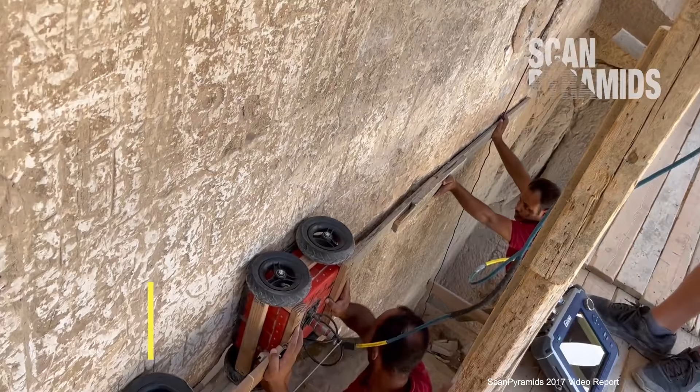But despite the huge number of hypotheses put forward, experts still do not have even a rough understanding of how the pyramids were built. In an attempt to find at least some clue, scientists scan them in every possible way and launch robots into the shafts. But the mystery of their construction remains unsolved.

However, maybe we are just looking in the wrong places. Perhaps we're trying to complicate things so much, putting so much faith in modern, high-tech research methods that we're missing out on the simplest and most obvious things. What if, to unravel the mysteries hidden beneath millions of tons of stone, we don't need to conduct 1,000 measurements, but can simply determine only one number?

You've probably heard many suggestions that the ancient builders recorded their knowledge of the world around us in the Great Pyramid of Khufu. By examining the geometric dimensions of this pyramid and the various relationships between them, researchers discovered that the architects had encoded in it the number of days in a year, the parameters of our planet, the distance from the Earth to the Sun, basic mathematical constants, and much more.

Renowned pyramid researchers of the early 20th century, the brothers John and Morton Edgar, even believed that the Great Pyramid is a Bible in stone, built to reveal prophetic truths about the end of the world, and that the dimensions of the pyramid's corridors encode a chronology of biblical events.

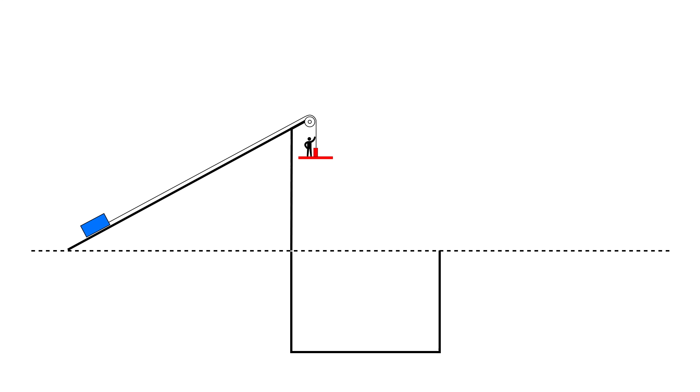In my previous videos, I put forward the hypothesis that during the construction of the pyramids, the blocks were lifted with the help of a counterweight, which was people, and pits like those we see at Abu Rawash and Zawiat el-Aryan weren't just used for constructing chambers. They were an essential part of the mechanism for lifting building materials. Platforms with counterweights were lowered into them, and the people who acted as this counterweight then ascended the sloping ramp.

This method originated in ancient Egypt even before the first pyramid was built, and was used to construct stairway tombs. That's why builders always created a central shaft and inclined stairs inside them. It was this system of inclined stairs and chambers that later became the prototype for the internal structure we see in the Pyramid of Djoser and most subsequent pyramids.

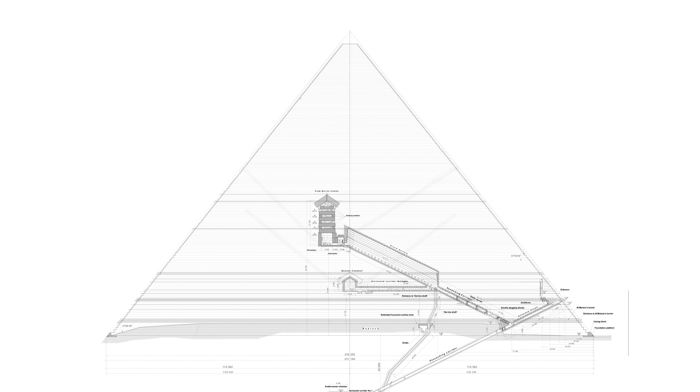And when the chambers and corridors in the Great Pyramids of Meidum, Dahshur, and Giza rose above ground level, so did the pits and ramps. Only these pits were created not in the rocky foundation under the pyramid, but directly in the masonry of blocks. We can see what this looked like in the Pyramid of Sahure, the ruler of the 5th dynasty. I described all of this in detail in previous parts.

However, to continue our journey toward understanding how these grandiose structures were built, we must at some point move from analyzing general principles to determining specific numerical parameters. We need numbers. We need some quantitative characteristics that we can rely on to move forward. And I believe from this perspective, the hypothesis under consideration has one enormous advantage.

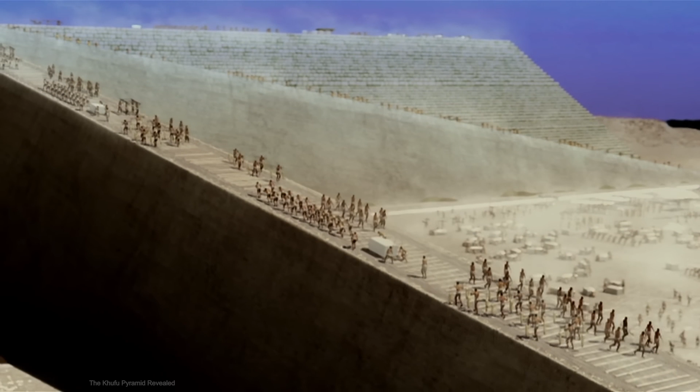For example, if we assume that the pyramids were erected this way, with the blocks simply hauled up ramps by hand, or, say, lifted along their sides in the manner described by Herodotus, we can hardly expect to discover any mathematical regularities associated with the construction process. After all, it essentially makes no difference how far you haul a block, 3 meters closer or 5 meters further.

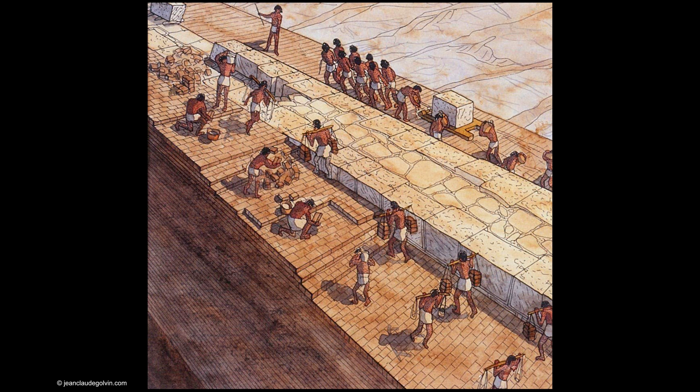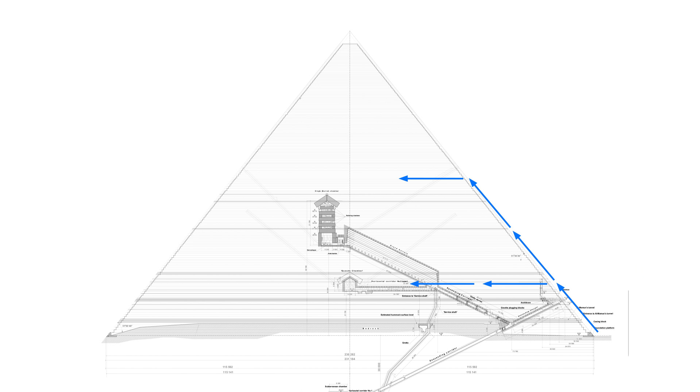For such methods, the specific dimensions of the pyramids are also unimportant. Of course, the dimensions will certainly influence the overall volume of work required, but they are unlikely to have a significant impact on the design process. But if a counterweight lifting technology was used for construction, then the entire system, no matter how complex and multi-stage it was, had to have one critical parameter: the maximum length of the ropes used.

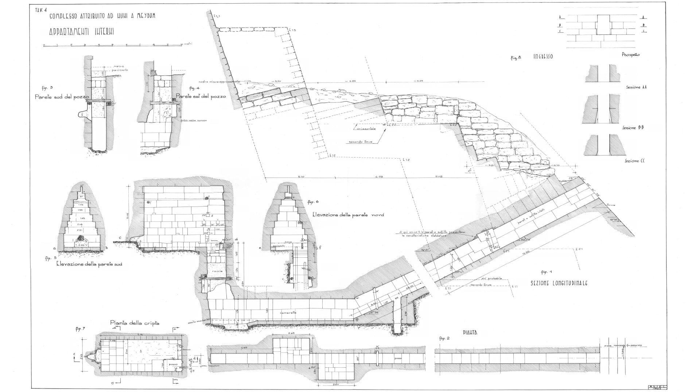Because such ropes had to be produced in huge quantities, I want to clarify right away that we're not talking about the maximum theoretical length. One rope can even be made a kilometer long. We need to find a standard, because if the proposed hypothesis about the use of a counterweight is correct, then this standard value would have been a key parameter in the design of the pyramids and would have been taken into account repeatedly in various aspects of construction.

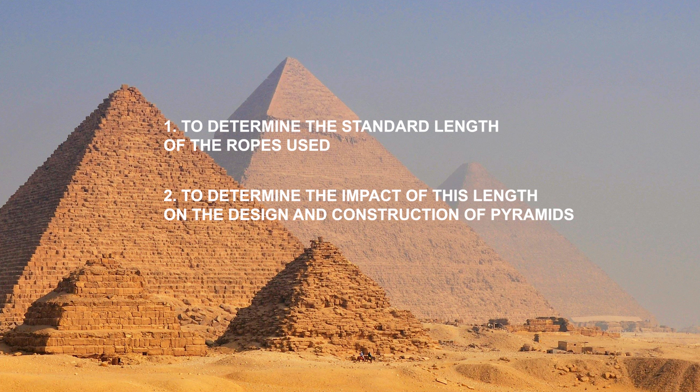So our task is, first, to determine this standard rope length, and second, to understand how exactly this length influenced the pyramid design process. That is, to find features, geometric regularities, or patterns in the internal system of these structures that could be explained by this value. And thirdly, for a complete picture, it would be desirable to understand at what point exactly this standard for rope length appeared, how and when it changed, if of course such changes occurred.

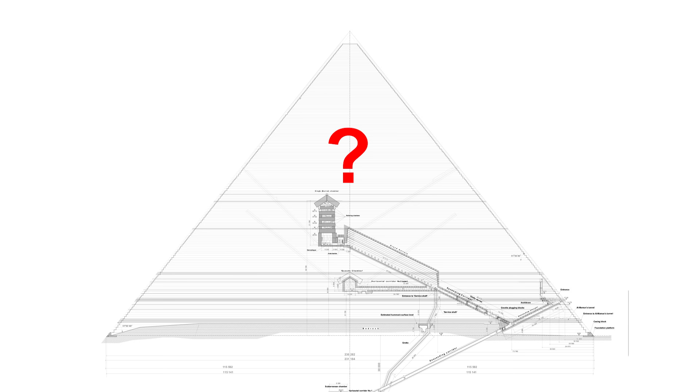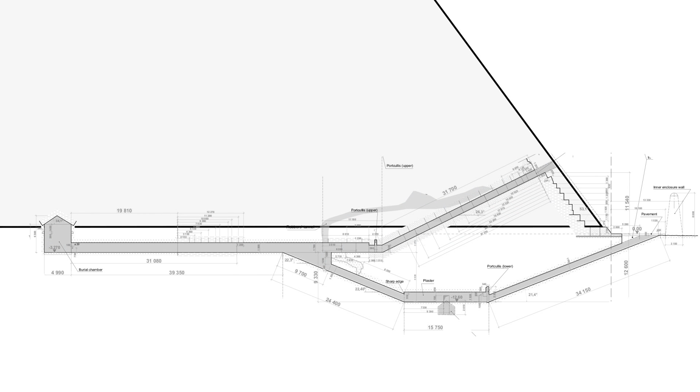Let's start from the beginning. How can we even approximately determine this key value? The idea of how to do this came to me while studying the drawings of the pyramids of Pharaoh Snefru. It's not hard to see that in the larger pyramids, the highest points of the corridors are raised significantly above ground level. Even in the Pyramid of Khafre, both chambers of which are located below ground level, the corridor still rises high. What could this have been done for?

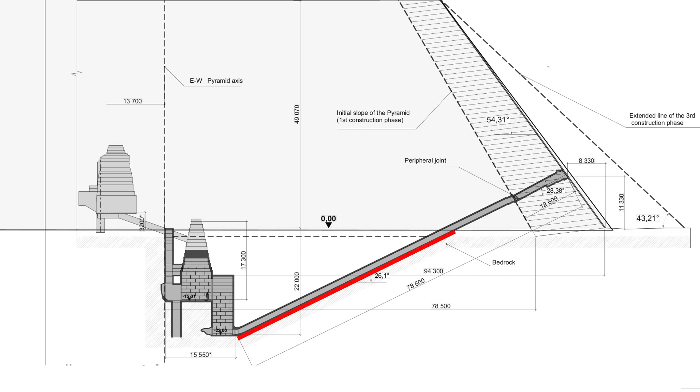As is well known, to create corridors below ground level, inclined ramps were cut into pits. Only the presence of such a straight ramp allowed for a straight corridor to be laid above it. Consequently, in the large pyramids for the corridors located above the surface level, similar ramps had to be created, but directly in the block masonry. In my opinion, there was simply no other way to ensure the straightness of the corridor layout. I believe that the upper edge of exactly such a ramp is what we see at the entrance to the Bent pyramid. I've highlighted it in Franck Monnier's sketch.

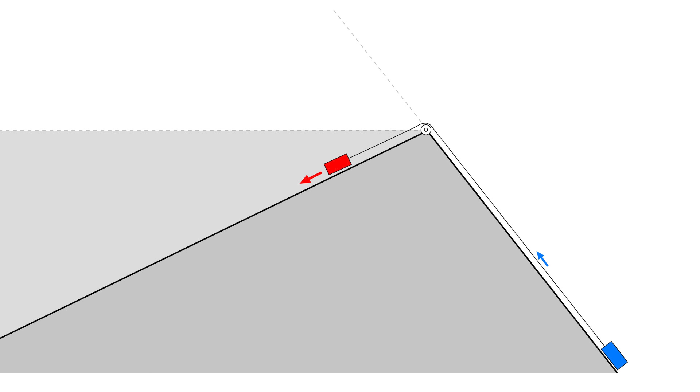And if so, it's reasonable to assume that these ramps were used to lift the blocks and that a counterweight moved along them. Perhaps it was some kind of platform, or they were simply people pulling ropes, thus using both their weight and their muscle power. It's a very simple and very effective method, and I think the ancient builders simply couldn't ignore such a possibility. Now let's look at the pyramids whose corridors are raised higher than all the others. These are the Red and Bent pyramids of Pharaoh Snefru.

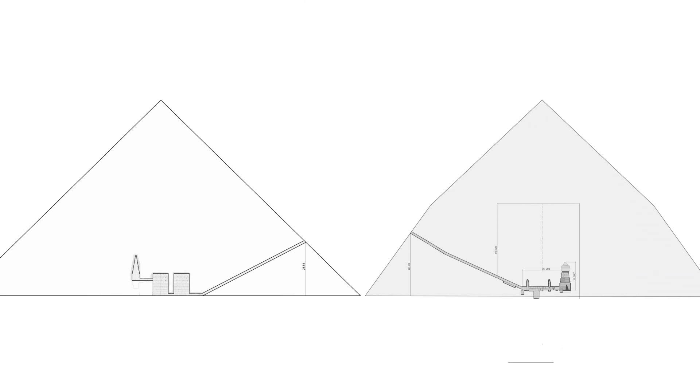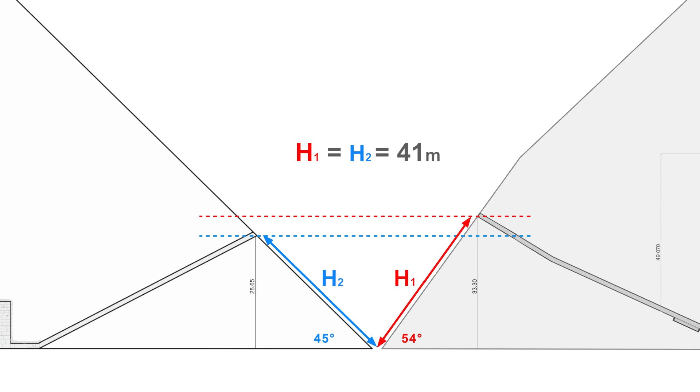Interestingly, despite the pyramids' identical overall heights, the tops of their corridors are at slightly different levels. However, because the pyramids' angles are different, the distances along the face from the tops of the corridors to the base are the same. This coincidence suggests that the builders were likely concerned not with the exit height itself, but with this distance along the face, because the length of the ropes used had to be enough to reach from the bottom point to the ramp. In both pyramids, this distance is approximately 41 meters.

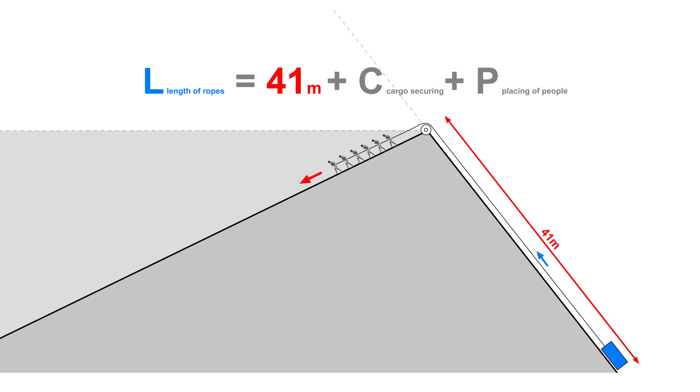Therefore, the length of the ropes was equal to this value, plus some allowance for securing the load, placing the pulley, and placing the people. This is, of course, only a rough estimate, but it gives us an idea of the acceptable range of values for such an important parameter. And now, as strange as it may sound, I am ready to name the exact value of the sought quantity. The ancient Egyptians measured length in royal cubits. 1 cubit equals 52 centimeters and 4 millimeters. And quite logically, the builders chose a round number for such an important parameter: 100. That is, the maximum length of the ropes

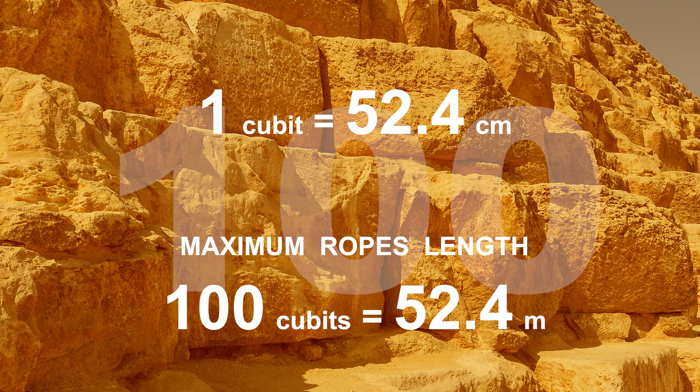was 52.4 meters. As soon as this idea occurred to me, I, of course, immediately began searching for information about the numeral system used in ancient Egypt. Unlike the system we are familiar with, it wasn't positional, but at the same time, it was decimal. It had its own symbols for each power of 10. So for them, 100 truly was a round number.

But what intrigued me most was the symbol used to represent this number. It's a rope with a loop. Apparently, such ropes were produced in such vast quantities that their length even determined the symbol for the number 100. Some sources also indicate that ropes of this length were used to measure land plots. If so, this only confirms my assumption that this length was the standard for manufactured ropes.

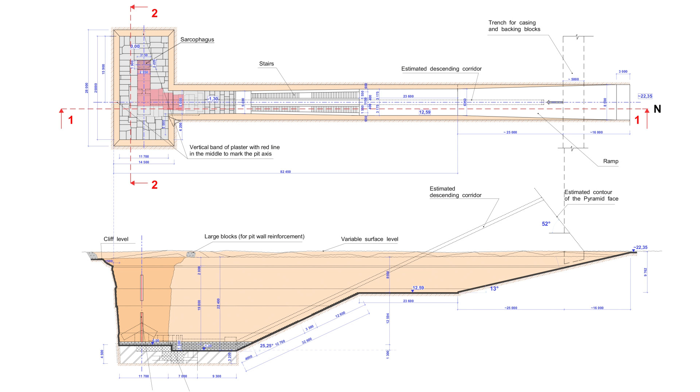And what is very important, this guess has one more crucial argument. The fact is that all the pits whose dimensions we can determine have a depth of 22 meters. The pit in Zawiyet el-Aryan, the pit in Abu Rawash. The pit created for the lower chamber of the Bent Pyramid also had this depth. Furthermore, in the Khufu pyramid, the King's Chamber is vertically separated from the Queen's Chamber by the same 22 meters.

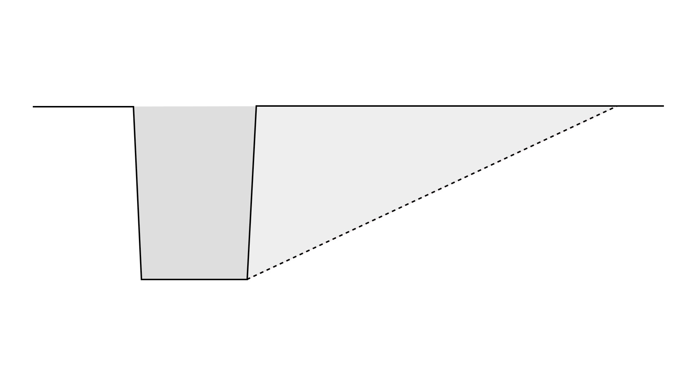I've always been curious about the reason for this kind of standardization, and now it seems to me the answer is obvious. The angle of inclination of the descending ramp in all these pits is almost the same and is equal to approximately 26 degrees. And with this ramp angle and a pit depth of 22 meters, the ramp length is just over 50 meters. That is, the standard depth of the pit was chosen so that the length of the ropes would be sufficient to lower heavy blocks for the construction of the chamber and filling the space around it.

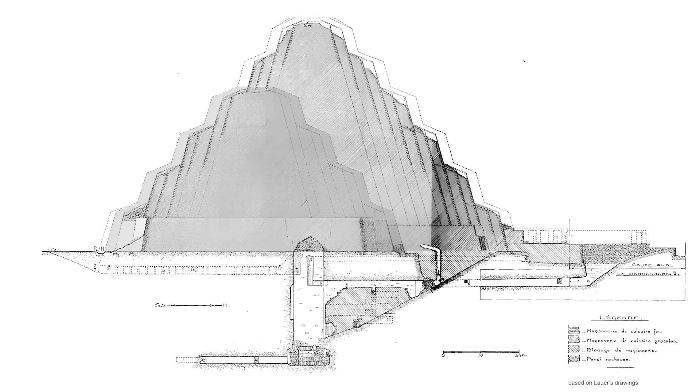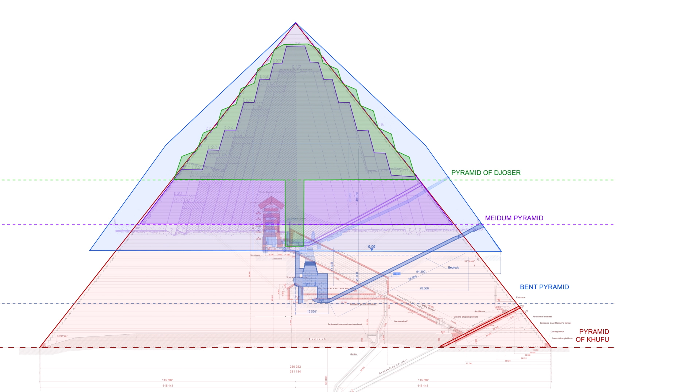I've previously discussed the basic principle behind the development of the first pyramid designs, which I was able to understand by analyzing their drawings. According to this principle, to increase the size of each subsequent pyramid, the designs weren't scaled up as they would be today, but rather a new part was added to the previous design. Moreover, this part was added not from above, but from below. What's crucial is that this development occurred in precisely 22-meter increments.

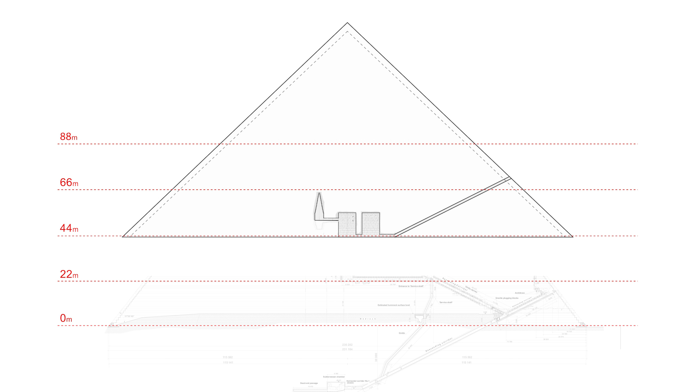This is clearly visible if we compare the pyramid drawings and align them with their apices. Meidum pyramid, Red Pyramid, Bent Pyramid. Moreover, even the pit of the pyramid in Abu Rawash fits perfectly into this ladder.

Furthermore, let's compare the heights of the first pyramids. The pyramid of Djoser is 60 meters high. The Meidum pyramid is usually considered to be 92 meters high, but that's assuming it had been fully developed into a true pyramid. As it was, its height was approximately 82 meters, 22 meters more than the pyramid of Djoser. The Red and Bent pyramids are 104 meters high, another 22 meters more. And in the pyramid of Khufu, the designers added two 22-meter increments, resulting in the famous 147.7 meters.

I am confident that such quantization of the pyramids' heights and the placement of their internal chambers can only be attributed to construction technology. The fact that the pyramids were built in 22-meter increments and that the chambers are spaced 22 meters apart suggests that the construction of the central part of the pyramids occurred in stages.

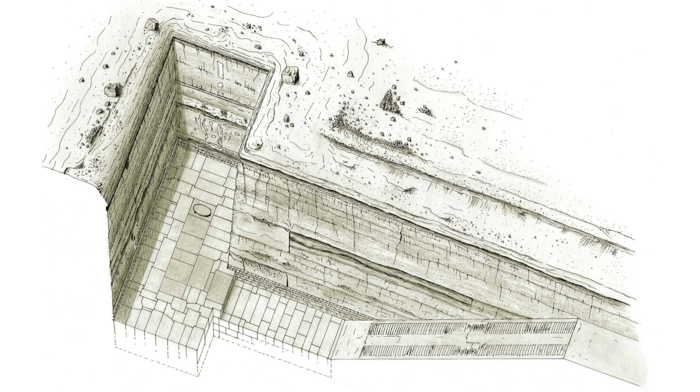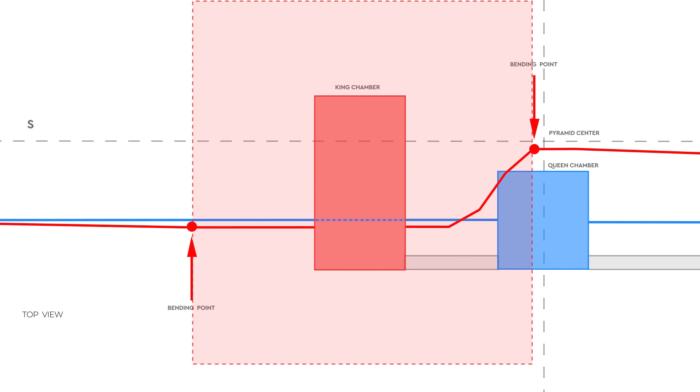The coincidence of the height of each such stage with the standard depth of the pits only confirms the previously expressed hypothesis that the chambers located above ground level were also built in improvised pits created directly in the masonry of the pyramids, and this entire internal system was part of the mechanism for lifting the blocks during construction. And now we have the opportunity to understand how the developmental steps of this system are related to the standard length of the ropes.

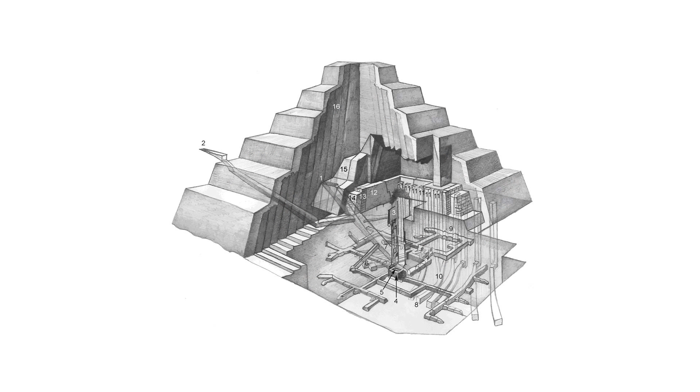Let's move to Saqqara, to the pyramid of Djoser. It was here, in the 27th century BC, that the development that would lead to the construction of the pyramid of Khufu just 100 years later began. Scholars still debate the exact trigger for the construction of this first Egyptian pyramid. What idea, event, or technological innovation served as the impetus for its construction? What exactly was the brilliant solution of the great Imhotep?

Of course, you could say that it was at this point that the ancient Egyptians developed new stoneworking techniques, and you'd be absolutely right. Before this, even the largest mastabas were built from unbaked bricks and gravel, and the Pyramid of Djoser was the first large structure constructed entirely of stone blocks. There's no doubt that this important factor truly influenced the capabilities of ancient builders, and most likely, a pyramid built from clay bricks would have simply crumbled under its own weight.

We don't have to look far for an example. The pyramids of the 12th dynasty, built almost 1,000 years after the Pyramid of Djoser during the Middle Kingdom. They were built from unbaked bricks, and despite their strong stone frame, they now look more like uneven hills than true pyramids. However, despite the rationality of this argument, stonework methods could not have been the sole reason for the construction of the first pyramid, because at the initial stage of its construction, a mastaba was erected. Yes, a large one, made of stone with a well-aligned facing, but a mastaba nonetheless.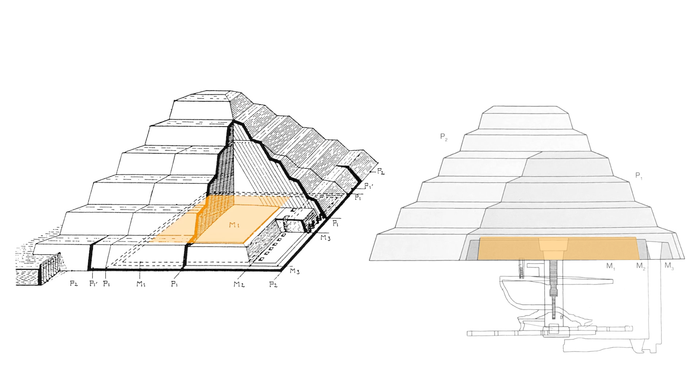It was subsequently added to twice more, but then something happened that prompted the builders to abandon all their previous achievements and build a pyramid on top of this mastaba in 2 stages. What could this have been? To solve this problem, let's try to answer another important question. What length of ropes were used to build Djoser's pyramid?

Before the first pyramid, the Egyptians built a huge number of mastabas. How I think this happened, I already told in this video. The central shaft, a necessary attribute of any tomb, was used to lower a counterweight, which was performed by people, and these people then returned back to the surface to repeat the cycle again and again. This is why inclined staircases appeared in tombs, and that is why in most tombs, the distance from the shaft to the edge of the mastaba is equal to the depth of the underground part of the shaft.

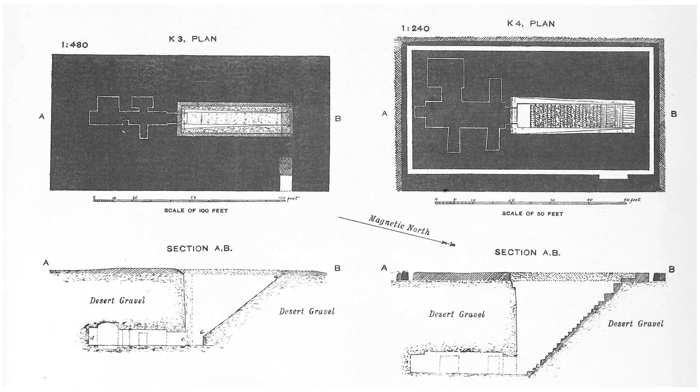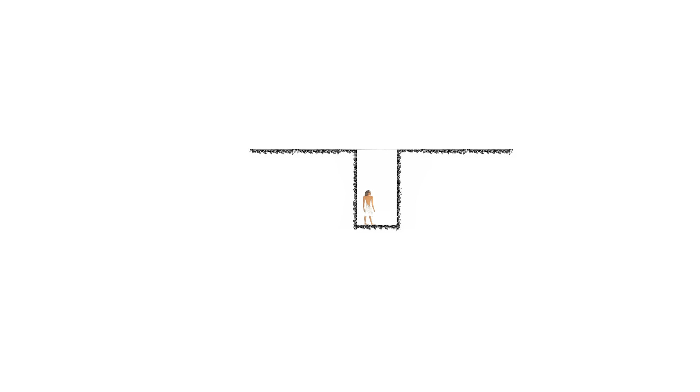In small mastabas, this shaft might be shallow, but for royal mastabas, they obviously tried to make the mastabas as large as possible, and the shaft, accordingly, as deep as possible. How were these shafts dug? There was only one option. People would descend, break through the soil or rock with whatever they could, and then climb back up, and so on for many months in a row.

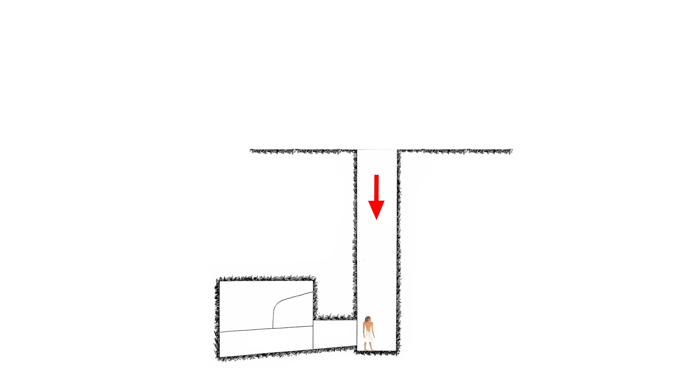What could limit this process? The answer is obvious: the length of the ropes, because there was no other way to descend into the shaft and retrieve the mined rock except by ropes. In other words, if the builders wanted to make the shaft as deep as possible, its depth was equal to the maximum length of the ropes used.

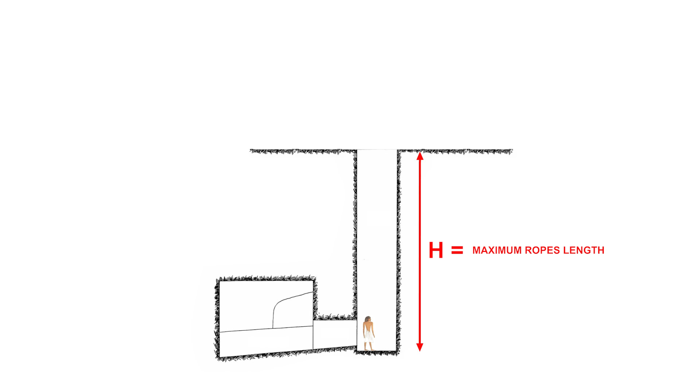However, after the shaft was completed, an above-ground part of the tomb was created on top, and the shaft passed through it. Consequently, the length of the ropes at this final stage may no longer be sufficient. Therefore, the builders had to either initially make the shaft shallower or provide for the possibility of workers exiting in the middle of the shaft.

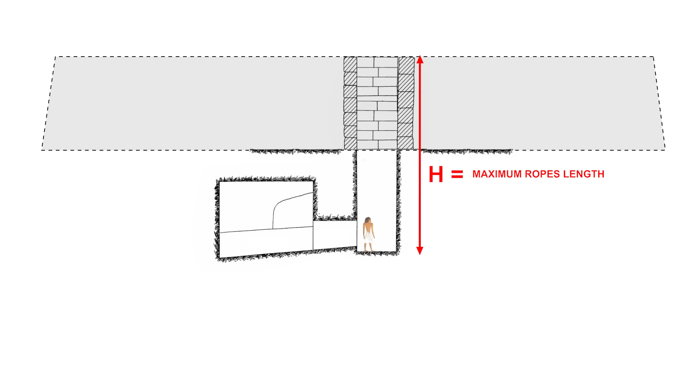I believe this is why such strange burial chamber configurations are sometimes found in shafts. The lower one was used at the beginning of construction, the upper one at the end. In this way, the builders attempted to optimize rope handling at different stages of the tomb's construction. Most likely, mastabas like these, with 2 shafts of different depths, were constructed using a similar principle.

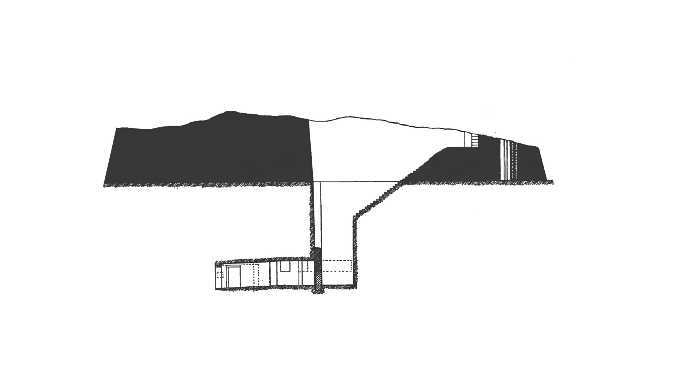I think the same logic was used in the creation of the so-called stair shafts. These are believed to have been a transitional form between stairway tombs and shaft tombs. Here is a diagram of the so-called Mastaba T on the Giza Plateau, also known as the Covington Tomb, which dates back to the 3rd Dynasty. Note that the height of this vertical segment of the shaft was equal to the height of the above-ground part. Let's try to determine the length of the ropes used to create it.

This length of rope was required during the shaft excavation phase. At the end of construction, due to the presence of steps, these same ropes were sufficient for the construction of the above-ground part, since workers who had descended the shaft could exit before reaching the very bottom of the shaft and climb up the stairs.

This means that these stair shafts were a more advanced version of the standard inclined staircases. In stairway tombs, the length of the ropes corresponded to the full depth of the shaft, while in stair shafts, only to the depth of the underground section. And this assumption is confirmed by the fact that the second segment of the shaft in Mastaba T has exactly the same depth. It was excavated as deep as the ropes would allow.

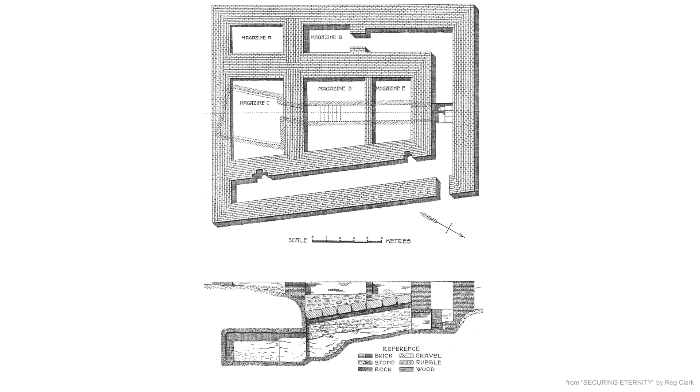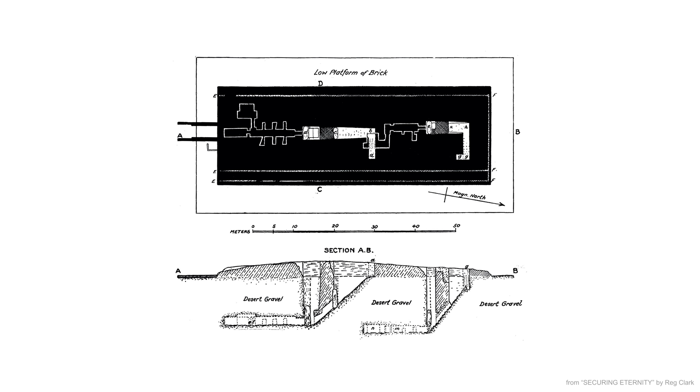And I would like to draw your attention to this important point separately. The development of ancient Egyptian tombs occurred gradually over many centuries. It's been described in considerable detail in the literature. However, the meaning of this development isn't fully understood. The idea that all these transformations were driven solely by a desire for maximum burial safety, as Reg Clark argues in his book, doesn't hold up to scrutiny, in my opinion.

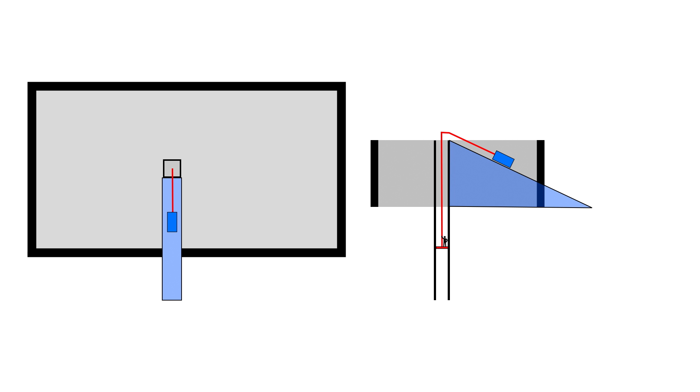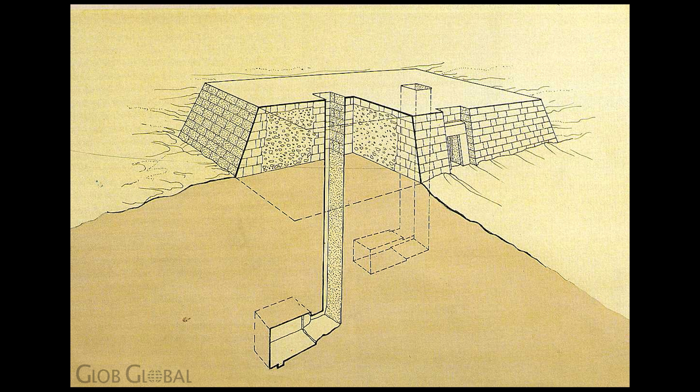But if we accept the version that the underground part of the tomb during construction served as a tool for creating the above-ground part, then everything immediately falls into place. If people descended into these shafts during the construction of the mastaba to act as a counterweight, then it immediately becomes clear why all these inclined staircases were created, why it was necessary to cut several vertical shafts, and why in later mastabas we see shafts of varying depths and strange configurations of burial chambers. Ancient engineers were simply trying to optimize the construction process and build faster and more with the resources available.

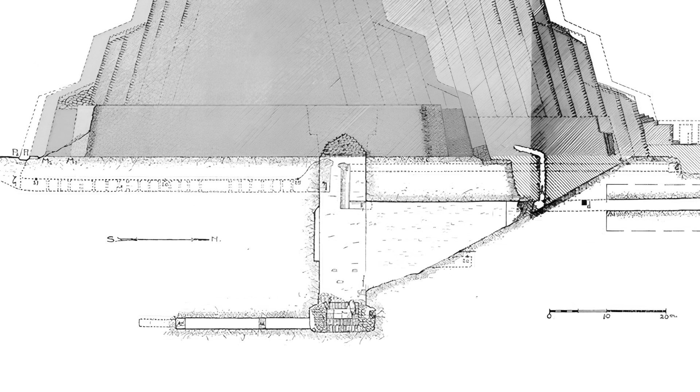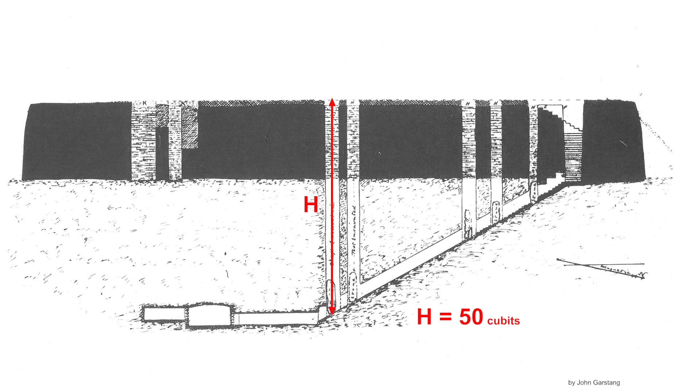An example of precisely this kind of optimization, in my opinion, are stair shafts, which allow for more efficient use of the length of ropes. At the same time, one cannot help but notice that the configuration of the underground part of the Djoser pyramid and the southern tomb located next to it represents just such a stair shaft. The depth of these shafts is 27 meters, or nearly 50 ancient Egyptian cubits. The shaft in Mastaba K1, which was built shortly before construction of Djoser's pyramid, has the same total depth.

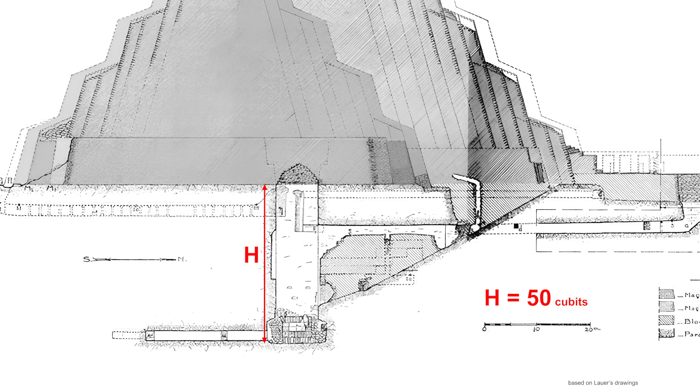All three of these tombs were built for pharaohs, so it's clear that their shafts were constructed as deep as possible. It turns out that these 50 cubits were the maximum length of ropes available at the time, and the builders used this value to determine the depth of the shafts. And there is one more confirmation of this. The inclined staircases in both Djoser's pyramid and the southern tomb were constructed using two segments. It's logical to assume this was done because the ropes simply weren't long enough to lower the heavy stones in one go. Therefore, the descent was divided into two sections.

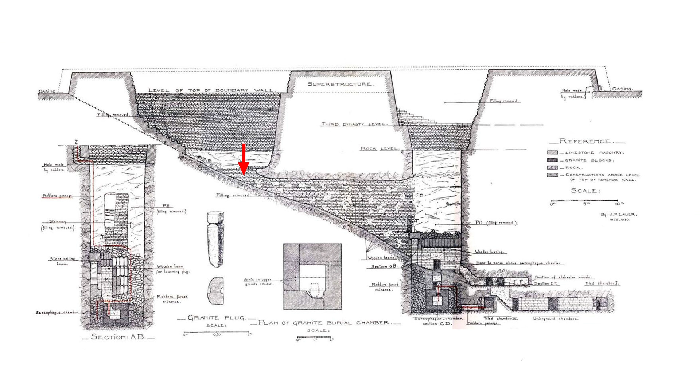At the lower end of the upper segment of the staircase in the southern tomb, we see a recess in the wall. There's a matching recess in the opposite wall. These were obviously necessary for the logs to which the ropes were tied. Don't be confused by the remaining masonry we see in the passage. It simply wasn't completely cleared. Originally, there were 2 rows of steps and a smooth slope down the middle.

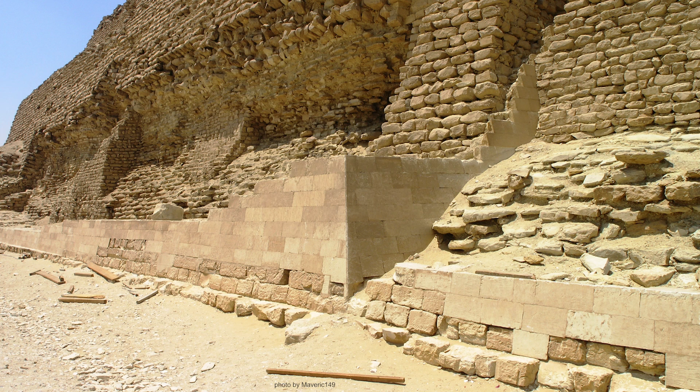We see roughly the same thing on the ramp in the Zawiyat El Aryan excavation pit. By the way, neither in this pit nor in the pit in Abu Rawash are there any notches visible in the middle of the ramps on the walls. And this tells us that the length of the ropes there was sufficient to lower the load in one go. So it turns out that the central mastaba beneath Djoser's pyramid was built with a maximum rope length of 50 cubits. What happened next? I think you already know the answer.

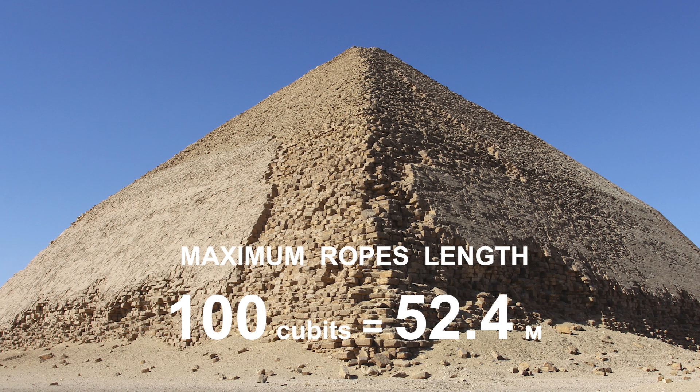The maximum rope length was doubled, and this new standard of 100 cubits, or 52 meters, 40 centimeters, subsequently became the main parameter in the design of the Great Pyramids and lasted apparently at least until the end of the reign of the 6th dynasty. I am confident that it is precisely because of this standard that we see continuity in the development of pyramid designs. If this standard had changed, the dimensions of all the intermediate construction stages, the depths of the pits, and the distances between chambers would have changed.

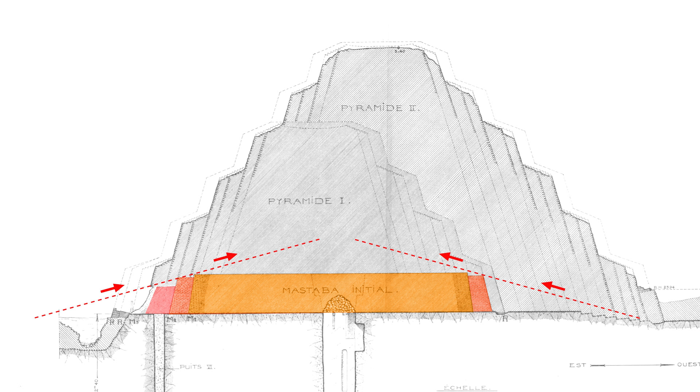As for the mastaba beneath Djoser's pyramid, while previously the ropes were sufficient to reach the edge of the mastaba, this upgrade made it possible to build a larger sand ramp and continue hauling blocks up it. I believe this explains why the subsequent extensions are slightly lower than the central section. This change in standard is confirmed by the fact that during the third stage of the pyramid's construction, the M3 extension was added to the side of the central mastaba.

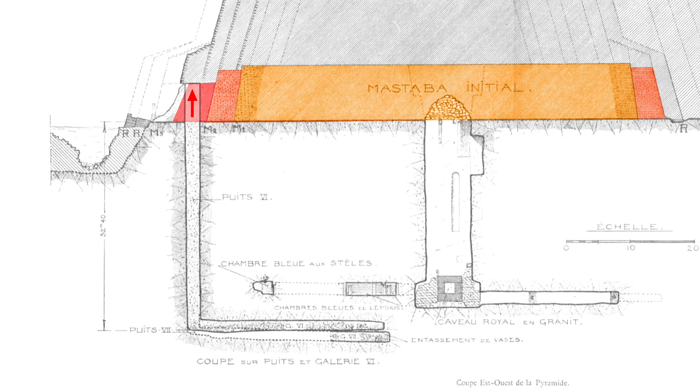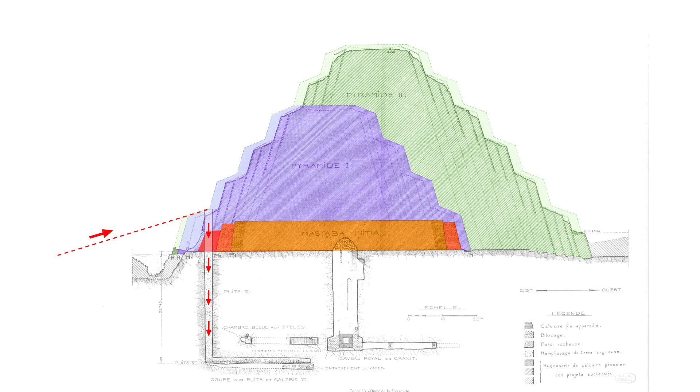This raises another important question. Could these shafts have been an additional tool for the construction of the first 40-meter-tall pyramid, which was then increased to 60 meters during the final stage of construction? If the central shafts in mastabas were used to lift building materials, then perhaps these were used in the same way. We won't try to give a precise answer to this question now, but I still want to share one interesting observation with you. Here's a drawing of the Djoser pyramid.

Its base measures 109 by 120 meters. We're looking at the long side right now. So that you can check me, I will display the coordinate grid. And here's a drawing of the Khufu pyramid to the same scale. Its base is 230 meters long. Earlier, I suggested that it had vertical shafts for the movement of the counterweight.

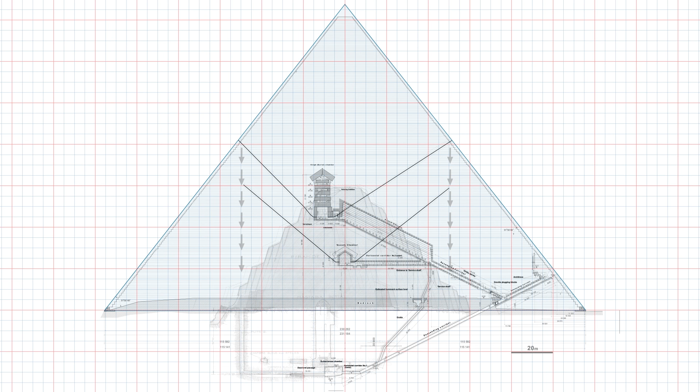Now let's try to align the pyramids relative to their apices. Notice how the shaft of Djoser's pyramid aligns with the king's chamber and the relieving chambers of the Khufu pyramid. Moreover, the southern incline channels abut the vertical line of additional shafts under the M3 extension.

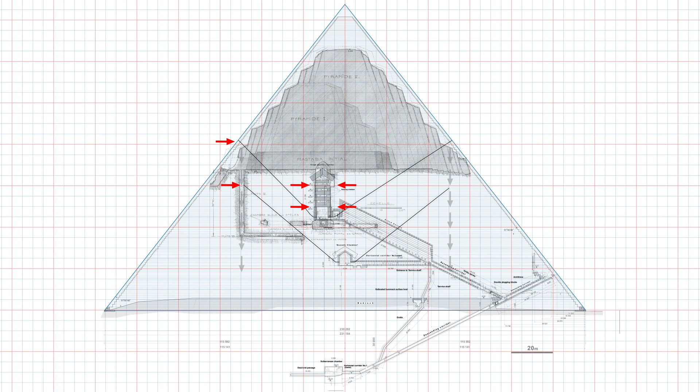Could all this be a simple coincidence? Or are such geometric patterns also dictated by the specifics of the overall construction technology? I think we'll be able to figure this out later.

Next to the three great pyramids on the Giza Plateau are the so-called satellite pyramids. They were built for the wives and immediate family members of the great pharaohs. To avoid confusion over their difficult-to-pronounce names, scholars have come up with short alphanumeric designations for them.

These structures have survived to this day in varying states of preservation, allowing us to trace the sequence of their construction. First, builders erected the inner core, consisting of steps on which backing stones were then laid, and then the casing blocks were installed on top of them. Remnants of this casing can still be seen here and there on the lower rows.

I believe that if we want to understand how the Egyptian pyramids were built, it's crucial to understand the construction methods of these relatively simple satellite pyramids, and only then try to extrapolate them to more complex structures. These small pyramids have no excavation pits or chambers with corridors above ground level. They are simply blocks, carefully stacked one on top of the other.

In the comments to previous videos, I've often been asked how I think the tops of the larger pyramids were constructed. I'm confident the answer is very simple. They were built in the same way as these satellite pyramids. What might their construction process have looked like? To understand this, let's pay attention to one very important detail.

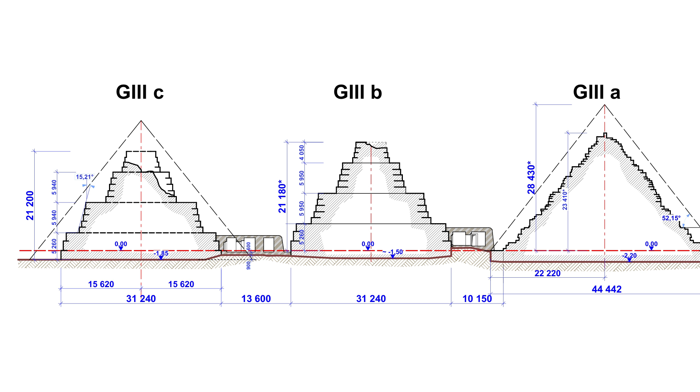In addition, the size of the ledge in front of the last step is very small. The block being lifted would barely fit on it, and it would hardly have been possible to place any lifting mechanism there. The only remaining option is a ramp. It would be possible to create an external ramp and gradually build it up. But then the volume of this ramp at the end would exceed the volume of the pyramid itself. So this option was possible for the first rows, but hardly rational for the entire pyramid as a whole.

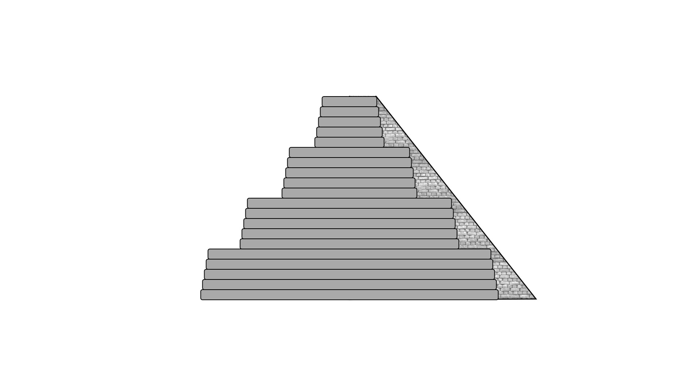So what's left? I think a temporary ramp could have been created from small blocks or clay bricks running from step to step. Its volume would have been relatively small. Each section would have rested on the next step, which would undoubtedly have increased its stability and allowed for its extension and repair in sections. There could be several such ramps, and they could go on all four sides for ease of feeding and installation of blocks.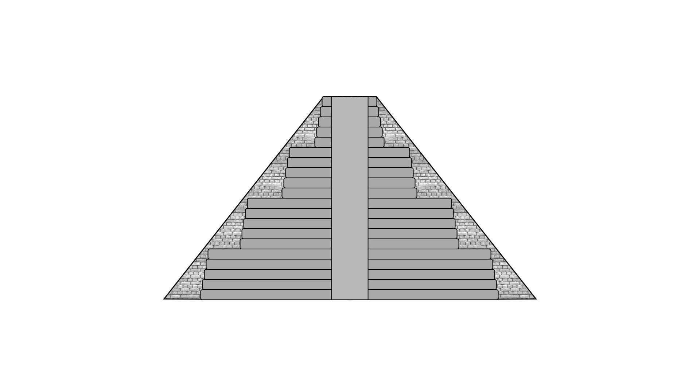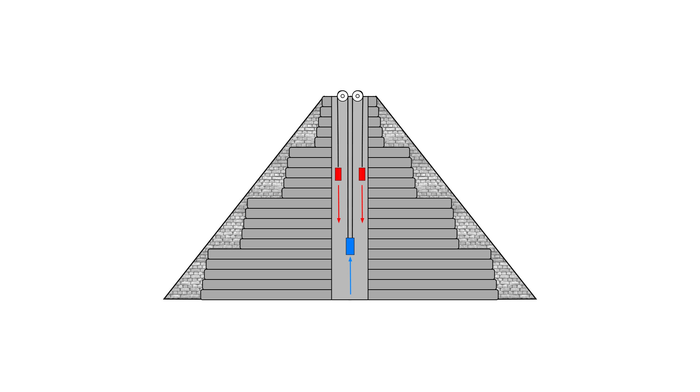The only remaining question is how the blocks could have been lifted up these ramps. It would certainly have been possible to move the counterweight along the same face as the block being lifted. However, I believe it would have been much simpler to move the counterweight along the opposite face. Stone inserts like these, found by archaeologist Selim Hassan on the Giza Plateau and dating back to the Old Kingdom, would have been perfectly suitable for this method. One insert was made of basalt, the other of dark slate.

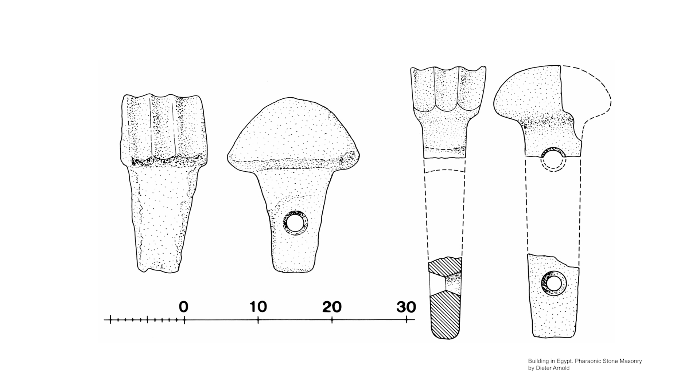This, of course, is not exactly a pulley in our modern sense, but to change the vector of force, such stone tools could well have been used in the construction of the pyramids.

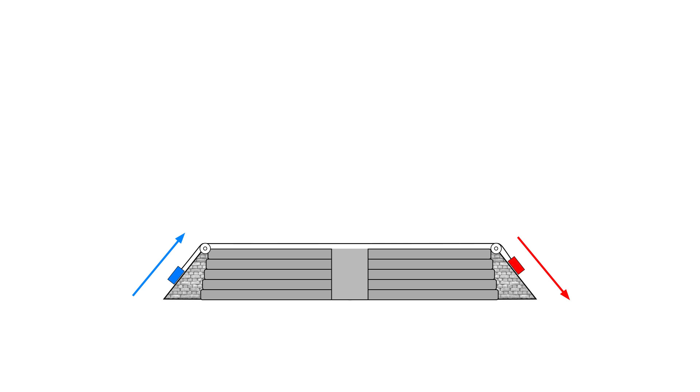And this idea of the counterweight moving along the opposite edge has another very important argument. It's the dimensions of the satellite pyramids themselves. They all have bases less than 100 cubits long. If the ancient builders had sought to embody some sacred standard in their pyramid designs, they would have made them all the same size. But the fact is, their dimensions vary.

This suggests that this 100-cubit limitation was most likely not dictated by any religious or artistic considerations, but rather a technical requirement during construction. What could its meaning have been? The fact is that with a rope length of 100 cubits, or 52 meters, and a face angle of less than 60 degrees, the ropes were always sufficient to move the blocks along the opposite face.

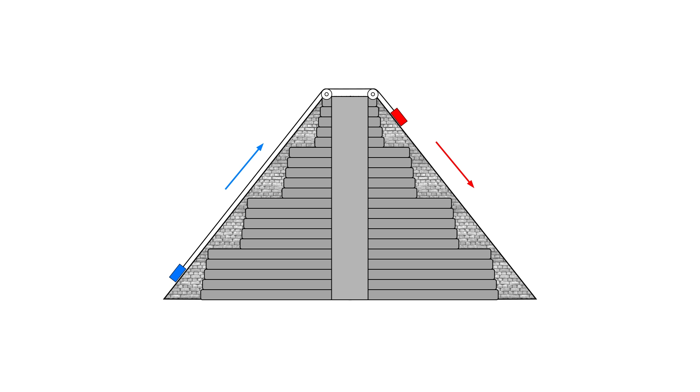That is, thanks to such a limitation on the size of the base, all the blocks could be lifted in one go. It turns out that for these small pyramids, the standard rope length of 100 cubits we discovered played a key role, essentially determining their dimensions.

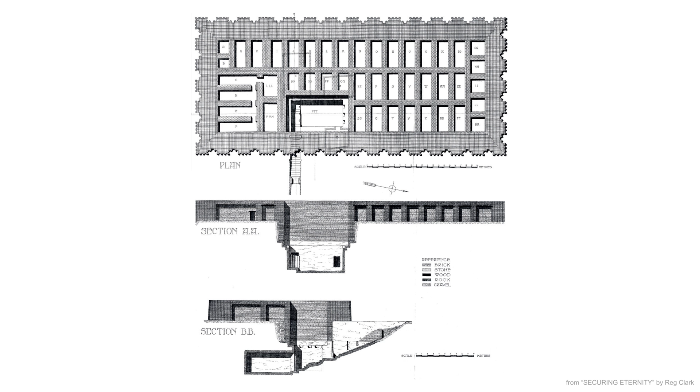As you can see, we have growing evidence to support the idea that people were used as counterweights to lift building materials during the construction of Egyptian pyramids and mastabas. This hypothesis provides a rational explanation for the changes in the configuration of the underground parts of tombs that occurred in ancient Egypt over many centuries.

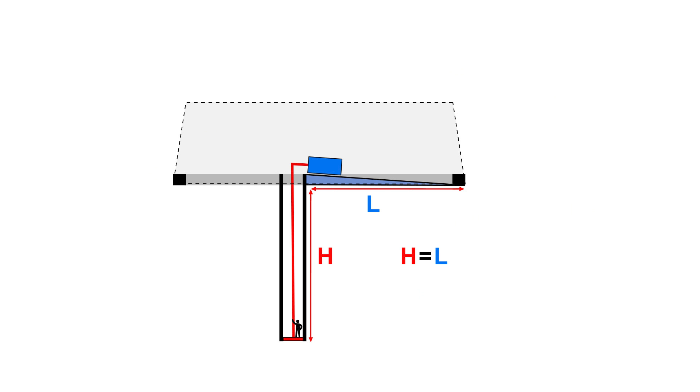Furthermore, as I've shown in this and previous videos, there is a clear correlation between the depth of the shafts and the dimensions of the above-ground parts of the tombs. Such patterns could not have arisen by chance. This correlation indicates that these shafts were used as tools during construction for the mastabas themselves.

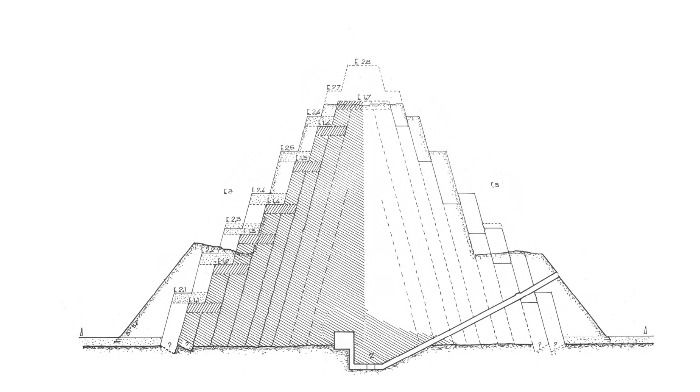And the fact that the layout of the underground part of the stairway tombs became the prototype of the internal system that we see in the Pyramid of Djoser and subsequent pyramids tells us that these methods of lifting building materials were also used for the construction of large pyramids. This is entirely logical and only confirms the gradual development of construction technologies in ancient Egypt during the early dynasties.

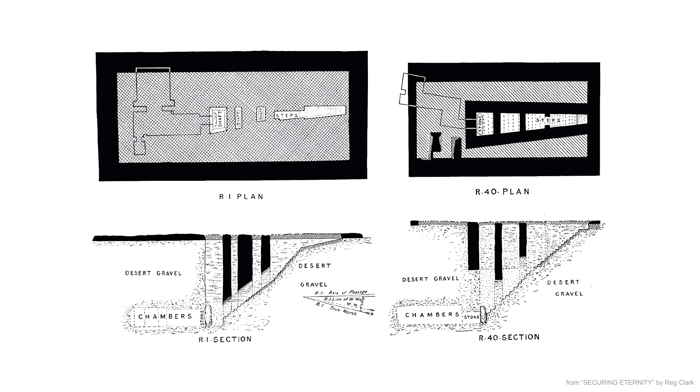And what is very important, the block lifting technology under consideration has one basic parameter: the maximum length of the ropes used. After all, a huge number of such ropes were required. We see how, even before the construction of the first pyramid, the ancient Egyptians attempted to optimize the configuration of the underground portion of their tombs precisely to use rope length more efficiently.

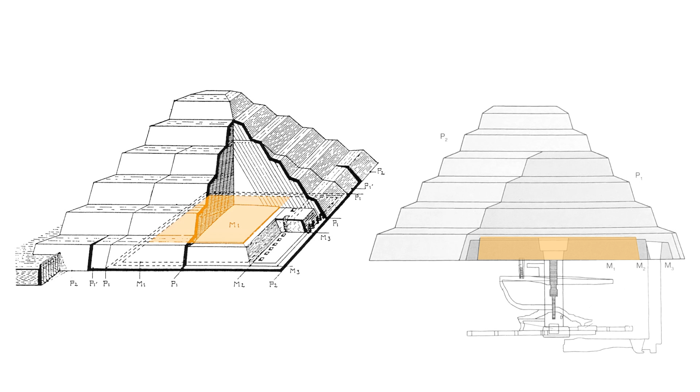When the shaft and the original mastaba were built on the site of the future pyramid of Djoser, the standard rope length was 50 cubits, which determined the shaft's depth of 27 meters. But this standard length was later doubled, allowing the first pyramid to be erected on top of the mastaba.

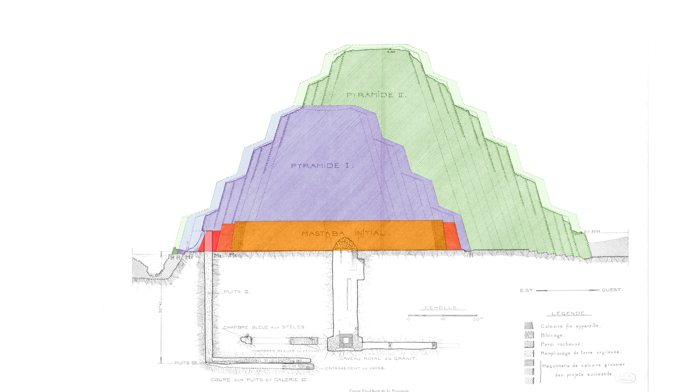And this standard of rope length of 100 cubits, in fact, determined the geometry of the internal structure of subsequent pyramids. It is precisely because of its immutability that we see continuity in the development of the first pyramid designs and the uniform step with which the pyramids grew in relation to each other.

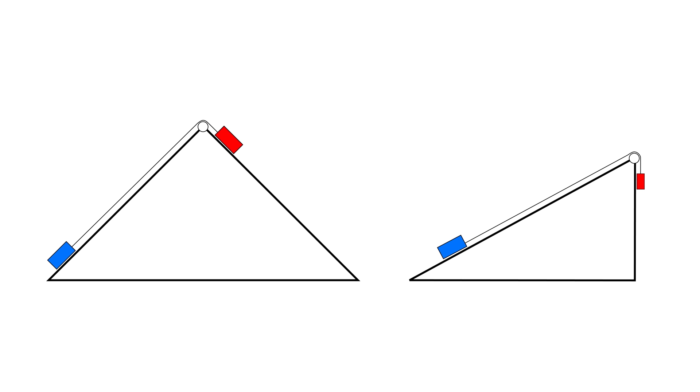This standard also influenced virtually every aspect of construction, being a natural limitation on the distance that blocks could be moved in one go. It determined the maximum height of the corridor exits, as well as the dimensions of the small pyramids. I'd also like to point out that the emergence of this standard wasn't necessarily tied solely to the labor-intensive nature of rope production, and most likely its numerical value was influenced by a large number of different requirements and restrictions associated with the building process and technological methods of the time period under consideration.

Does knowledge of this very important parameter allow us to answer all questions? Of course not. However, I am confident that determining the value of this key constant is both a serious argument in favor of the proposed hypothesis and a major step forward in our quest to unravel the mystery of the construction of the Egyptian pyramids.